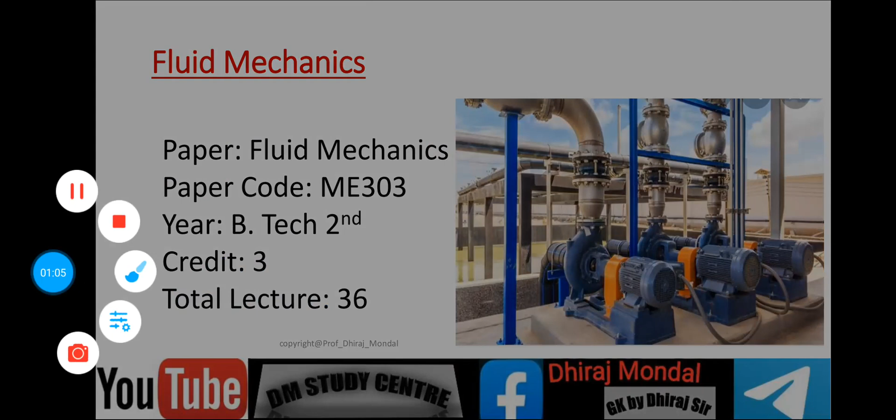The paper name is Fluid Mechanics, paper code ME303, for BTech second year students, credit 3, total 36 lectures. According to the syllabus, 36 dedicated lectures will be given. But don't take any tension about whether your syllabus will be covered - just follow my lectures, and this subject will be covered in depth through discussion.

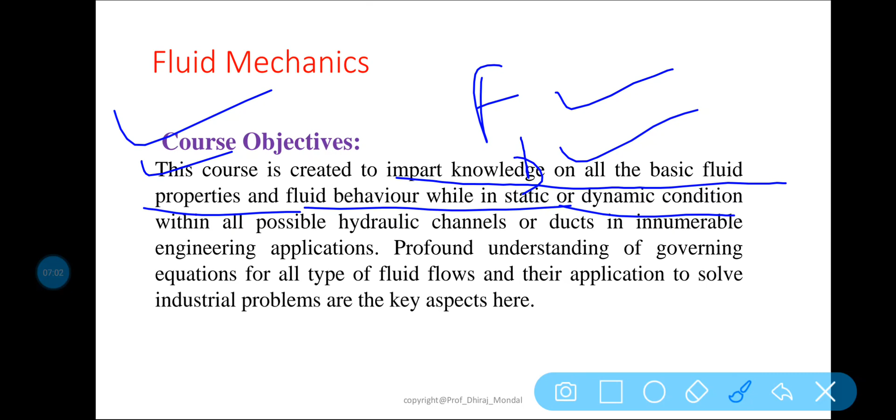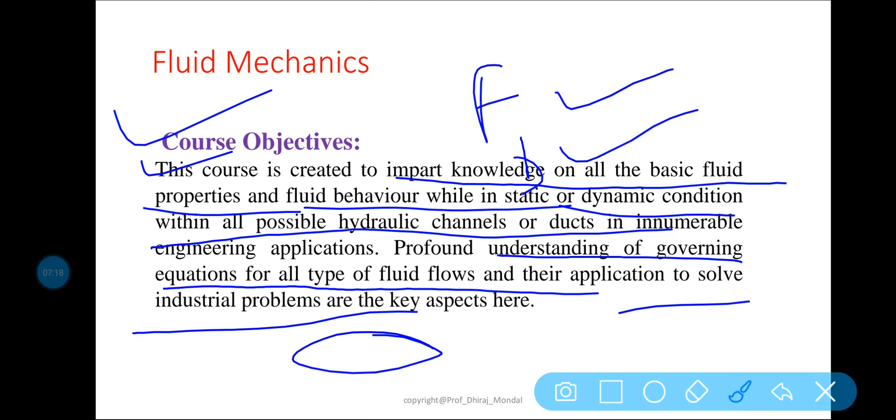So first of all, let us discuss the course objective. The course objective is created to impart knowledge on basic fluid properties and fluid behavior while in static or dynamic condition. The fluid may be in static condition, the fluid may be in dynamic condition. So based on that you have to gather knowledge within the possible hydraulic channel or duct when the fluid is flowing through an open channel or through a pipe. Also understanding of the governing equations of all types of fluid flows and their application to solve industrial problems and key aspects. So this is all about the course objective. I hope it is clear.

Now course outcome, what is the outcome, why you are studying this subject, very important. There are mainly six outcomes. The first outcome is overall - a student should be able to gain an overall idea about fluid flow problems.

Then, able to gain knowledge about the calculation of hydrostatic forces on flat and curved plates. We will be discussing later what is a flat plate, what is a curved surface, how much pressure is applied, what is the center of pressure, and all this will be discussed later on. So this is course outcome number 2.

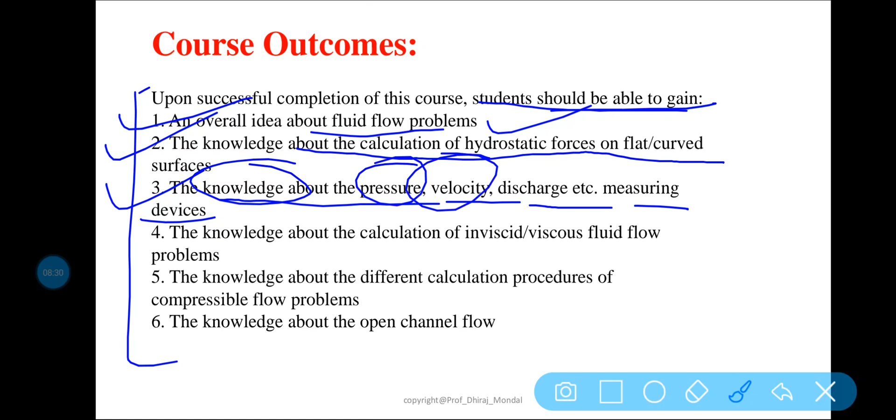Course outcome number 3: knowledge about pressure, velocity, discharge, etc. measuring devices. So some knowledge will be gathered on pressure - how we can calculate the pressure at a particular point, how we can calculate the velocity of a fluid, how we can calculate the discharge, that is the volume flow rate. These are the measuring devices.

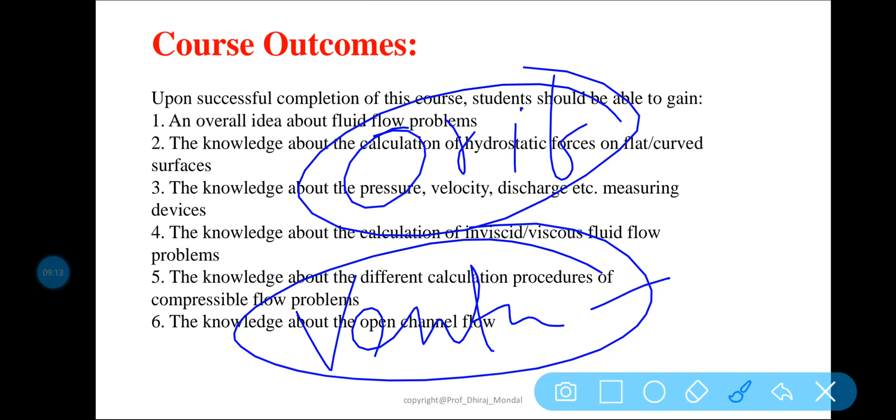You know that by the help of a barometer you can measure pressure, by the help of a manometer, by the help of a differential manometer you can compare pressure between two points. By the help of a pitot tube you can measure the velocity of a fluid when it is flowing. By the help of a venturimeter you can calculate the discharge. By the help of an orifice meter also flow rate can be measured. So these are the devices. By the help of Bernoulli's theorem, these devices - venturimeter, orifice meter and pitot tube - are all working.

So you know that outcome number 3, knowledge about pressure, velocity and discharge measuring devices, is very important - how it is basically applicable from an industry point of view, everywhere it is applicable. So when fluid is flowing through a pipe, how much fluid is flowing - whatever the oil, petrol, diesel, how much it is flowing, or from a water tank, how much water is discharged from a barrage.

By the help of this, your flow measuring instrument, you can device and measure the discharge by the help of a triangular notch, that is your V-notch, or rectangular notch - lots of measuring devices are there. By the help of that you can measure the particular discharge.

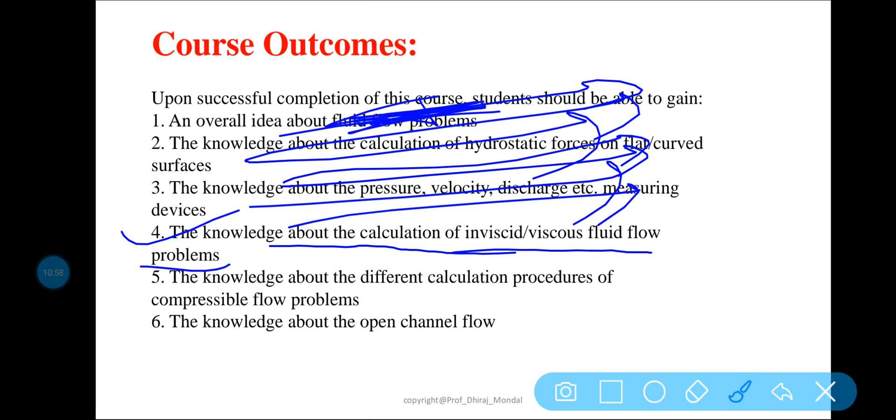Now come to the next point, point number 4: knowledge about the calculation of inviscid or viscous flow problems. Inviscid or viscous flow problem means - you know viscosity. What is viscosity? Viscosity is defined as the property of a fluid which offers resistance to the movement of one layer of the fluid over another adjacent layer of fluid. When the fluid is flowing, one layer of the fluid is gliding over another adjacent layer, and as a result you will experience some frictional dissipation and frictional resistance. Because of that the movement of the fluid is resisted - that is because of viscosity.

Now, the calculation of inviscid, that means a fluid which is not experiencing any kind of viscosity, is called inviscid fluid. So viscous and non-viscous fluid, the complicated and complex problems, you can solve by the help of course outcome number 4. This is our course outcome number 4. These will be discussed.

What is viscosity, what is Newton's law of viscosity, all these will be discussed later on in your upcoming session. So here we are discussing the overview of fluid mechanics - what is the course outcome, course objective, program educational objective, and all these will be discussed.

Next point is the knowledge about different calculation procedures of compressible flow problems. Compressibility means which can compress. If this is your cylinder and this is your piston, when the piston moves upward, the volume of the cylinder decreases. As volume decreases, pressure increases - P is inversely proportional to V, Boyle's law. So as pressure increases and volume decreases, temperature also increases, because PV equals MRT or nRT, so P is proportional to T.

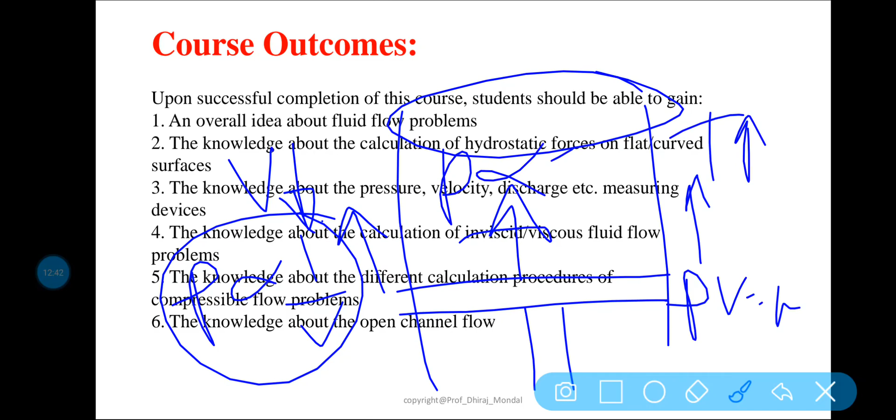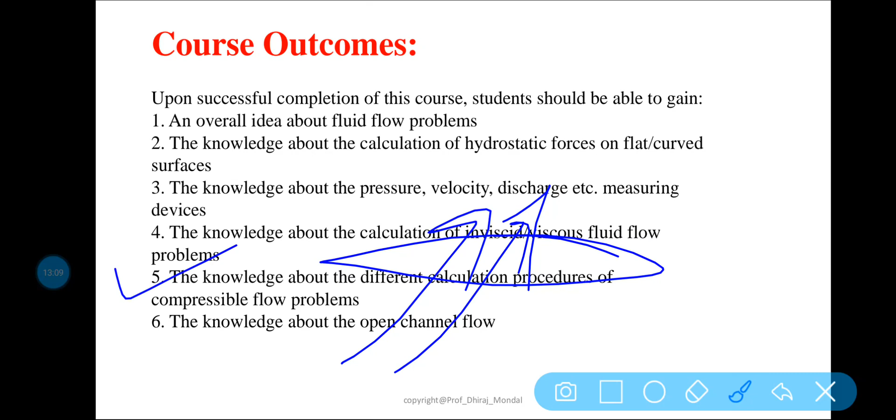So what I mean is, whether the fluid is compressed in nature or incompressed in nature, what about the calculation procedure? What will be the volume? What will be the other parameters and properties? What are the characteristics? All these phenomena will be discussed in this subject, noted in course outcome number 5.

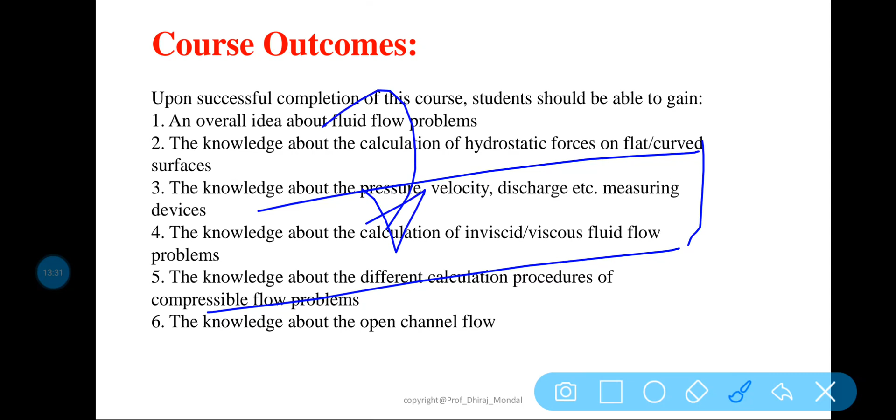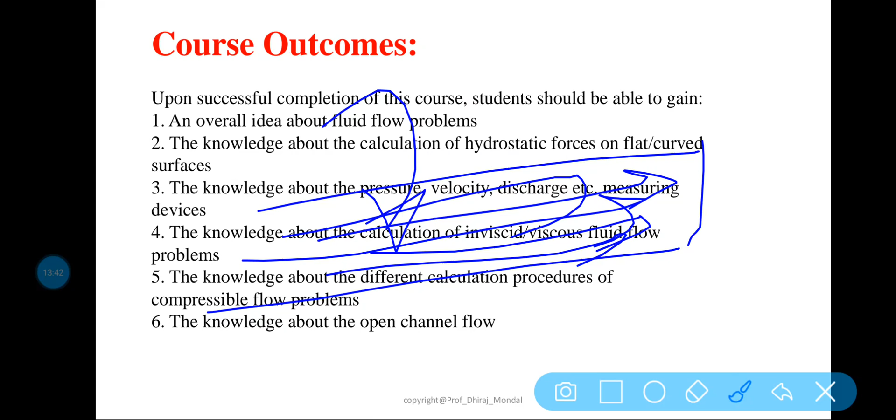Then course outcome number 6, knowledge about open channel flow. Open channel flow means when fluid flows through an open channel - the total system is open and the fluid flows through a canal or confined space, but at atmospheric pressure. Through open channel flow, the calculation, viscosity, velocity, all these measures will be done - this is course outcome number 6.

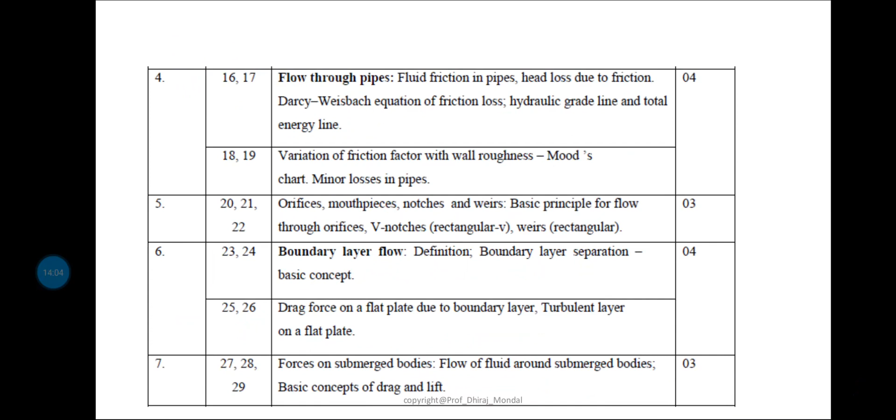Now let us discuss the syllabus. We have classified the syllabus into different modules. There are mainly 9 modules, and the lectures are divided based on these 9 modules. Module 1 will be taken in one lecture.

Introduction to fluid mechanics, fluid types, introduction to viscosity - these are discussed, but kinematic viscosity will also be discussed. Surface tension is not in the syllabus, but I will be discussing it because it's very important from your GATE point of view. This term is not given, although I will be touching on that part also.

Variation of viscosity will be discussed. What is surface tension? In case of soap bubbles, what phenomena occur? That will be discussed here also. Capillarity will be discussed - in case of soap bubble, water jet, hollow bubble, what are the surface tension effects? Then bulk modulus will be discussed, and a lot of things will be covered in this chapter for module number 1.

Next, module number 2, fluid statics. When the fluid is static, meaning at rest, what are the conditions? What are the pressure, force, and other parameters? Then for a submerged fluid - vertical, inclined, curved - what is the center of pressure, stability of floating bodies, what is metacenter? By the concept of metacenter, the ship is moving, why it is not tilting or flipping in water.

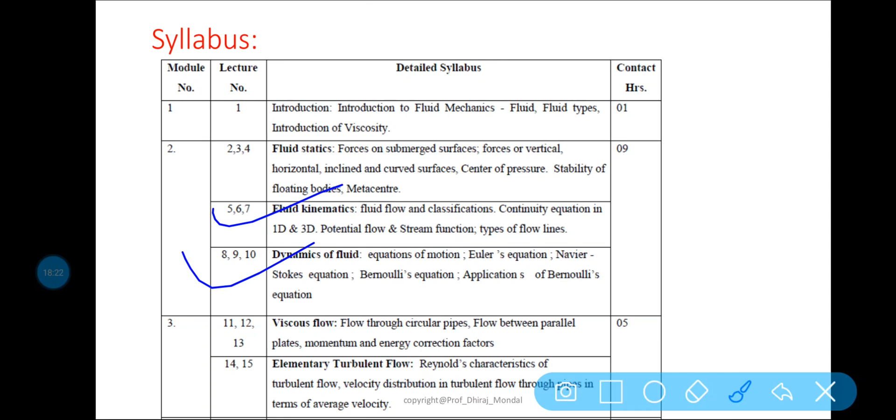Come to the next chapter, that is dynamics of fluid flow. Here, when the fluid is flowing, velocity and acceleration are discussed, and also we consider the force causing the motion of the fluid, which is called dynamics of fluid flow.

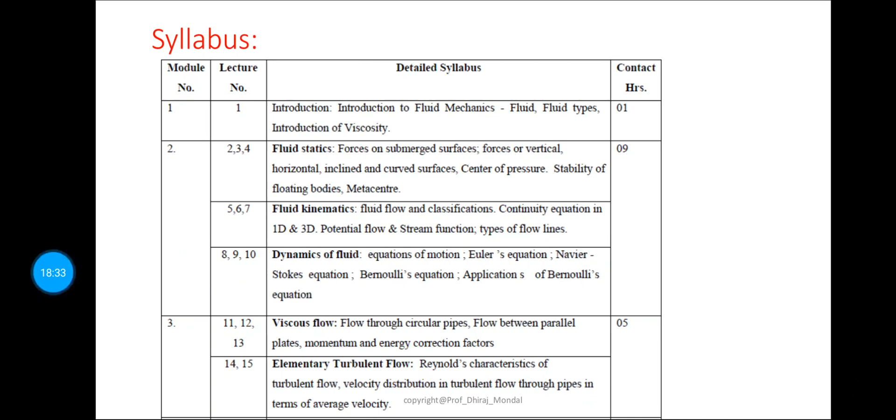So in dynamics of fluid flow, what we will be discussing is Euler's equation of motion. Then from Euler's equation of motion, how we can derive Bernoulli's equation of motion. Then Bernoulli's equation of motion will be discussed here.

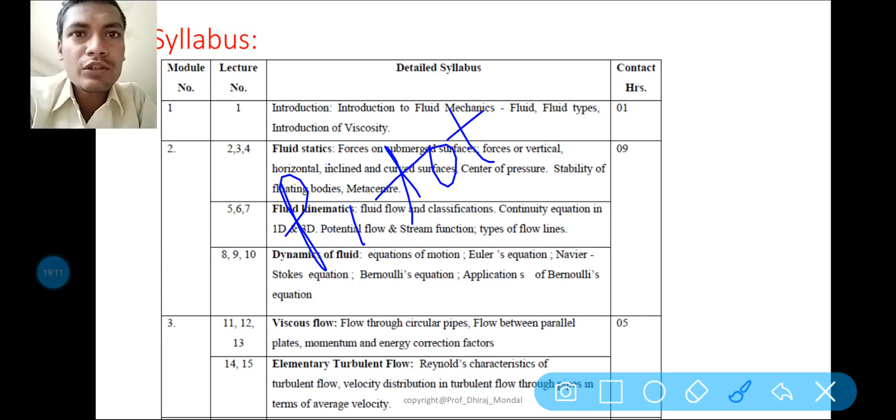After that, venturimeter - from the application of Bernoulli's equation there is a venturimeter device, orifice meter, then pitot tube will be discussed. Basically how it is operating, and what are the derivations, what is the calculation - all of this will be discussed in dynamics of fluid flow.

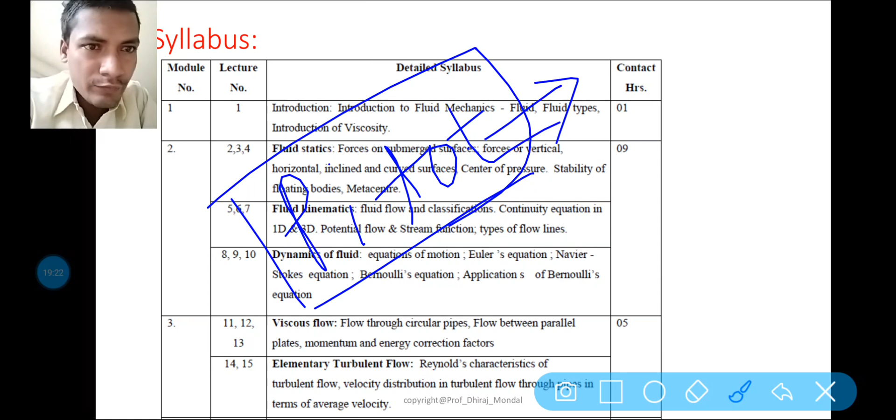Next come to viscous flow. When the flow is circular, meaning when the fluid is flowing through a circular pipe or parallel plate, then what is the momentum and energy correction factor, what phenomena occur in viscous flow, will be discussed. Then elementary turbulent flow - Reynolds characteristic of turbulent flow and velocity distribution in turbulent flow will be discussed.

I think it is clear. Now come to the next slide, that is module number 4. In module 4, flow through pipe will be discussed. Here mainly there are two types of frictional loss.

One is major loss, another is minor loss. Major loss is where Darcy-Weisbach formula and Chezy's formula will be discussed. By the help of that, when fluid is flowing there may be some frictional dissipation, frictional loss, and how much energy is lost because of that friction loss will be discussed here.

Minor loss occurs when the fluid is flowing and there is a bend section, or suddenly the diameter of the pipe is enlarged, or suddenly the pipe is contracted - contraction is occurring like this. So because of that, when the fluid is flowing, there is a joint between two pipes. Because of that there may be some energy loss, and what those energy losses are will be discussed here. I think it is clear.

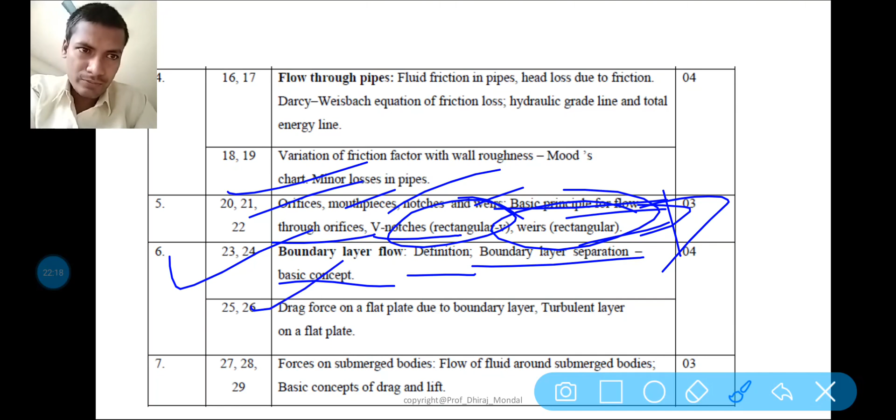Now boundary layer flow, very important. Definition of boundary layer separation, basic concept needed. Then drag force, then turbulent layer on the flat plate will be discussed.

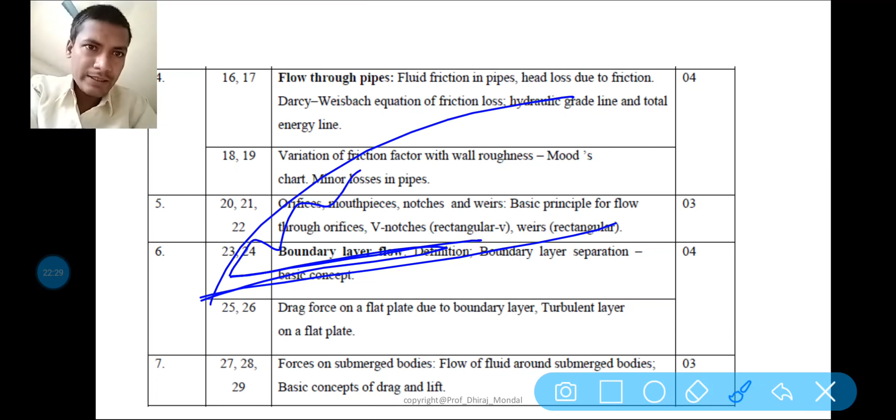That means when the fluid is flowing over a plate, there may be some friction, and because of that the flow may be rotational or irrotational. What is rotational, what is irrotational, will be discussed afterward when we talk about kinematics of fluid flow. So one by one we are proceeding.

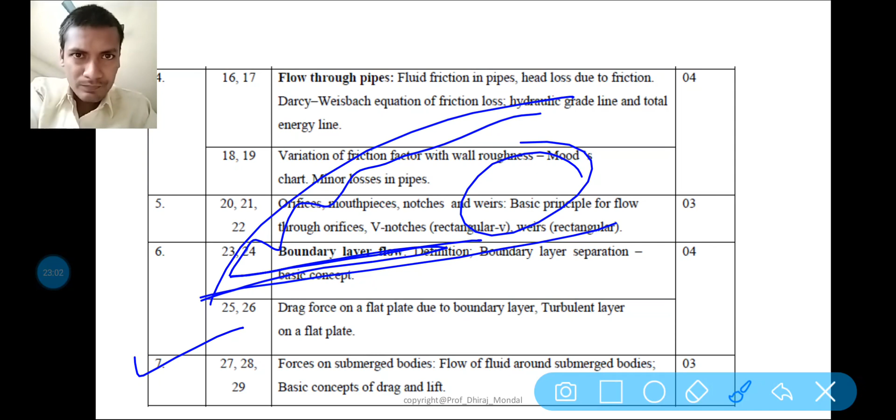This is your introduction class, and what we are talking about is the syllabus, what we are going to discuss in the later classes, in upcoming classes. So there should be some sufficient idea about what we are going to study, so that it will be more easy to understand after this part is discussed.

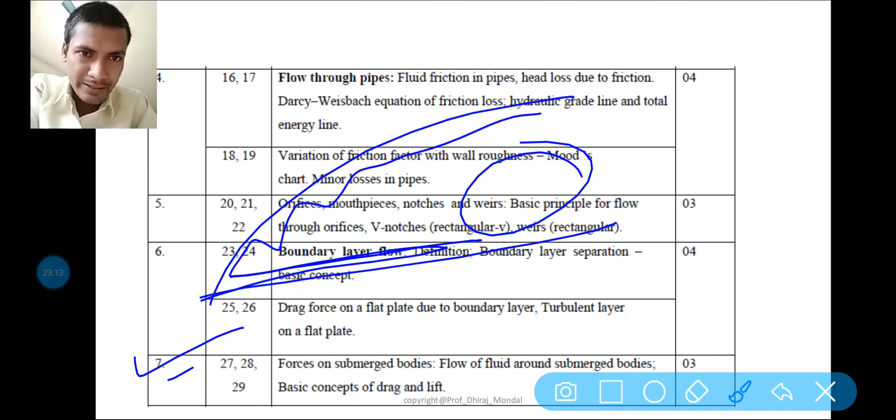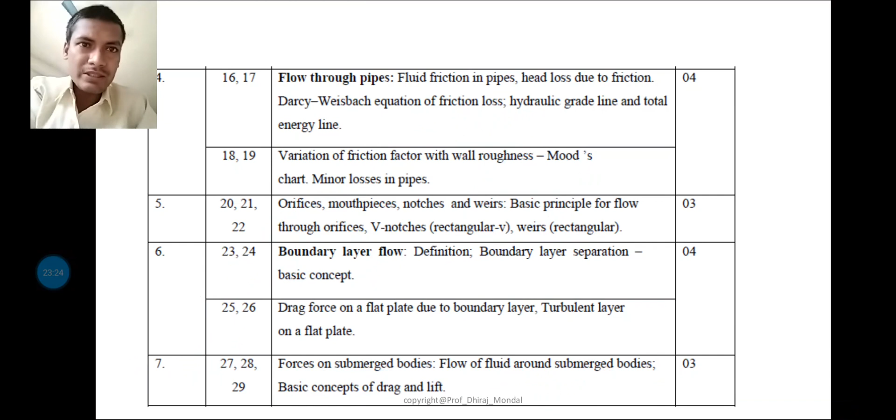Now coming to module number 7: force on submerged body, flow of fluid around submerged body, basic concept of drag and lift. So these are the syllabus, you can see. Sorry, that was not the last module. Module 9 is the last.

Here you can see module number 8, dimensional analysis and model studies. In this chapter, basically, it is used for design purposes, you can say.

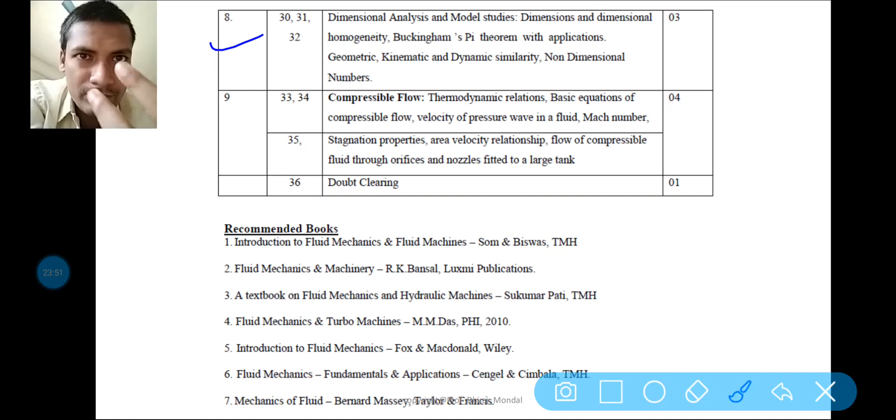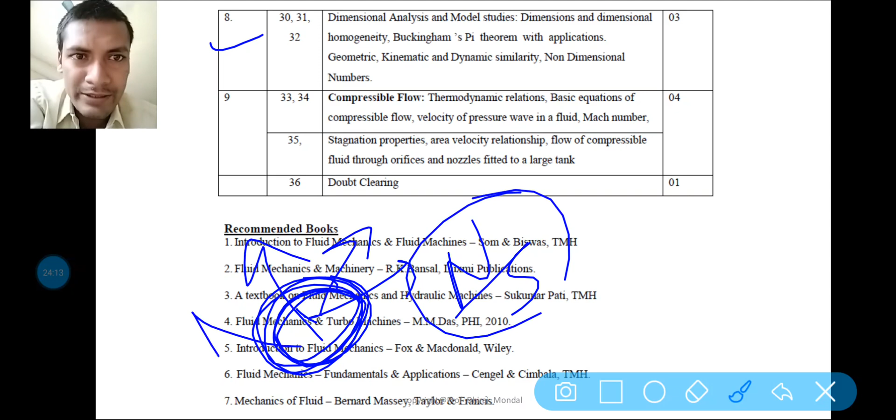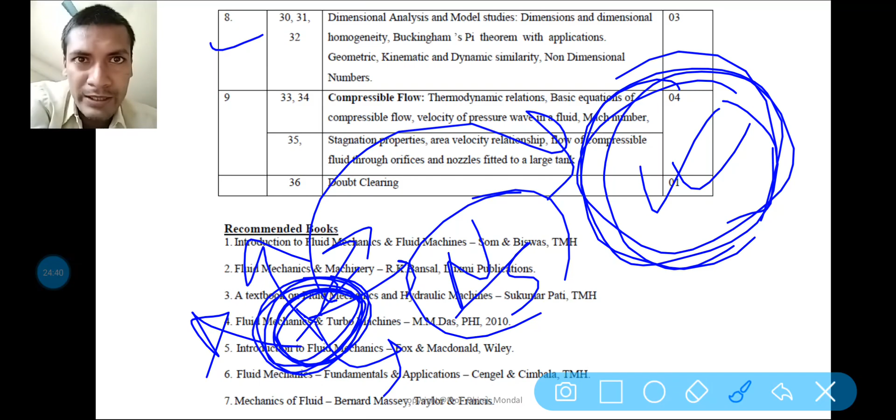That means when you are going to make a prototype, first you have to make a model. If you want to manufacture a hydraulic turbine, first you make a small model, and you compare that model, determine the specific speed, unit power, unit discharge, unit speed - all this you calculate, and based on that you make it in larger scale. That is your trial, because a large scale turbine you can't manufacture at a time - there are so many expenses and material costs. So first you make a model, then make it in large scale as a prototype. Some clear idea on this will be given in this chapter.

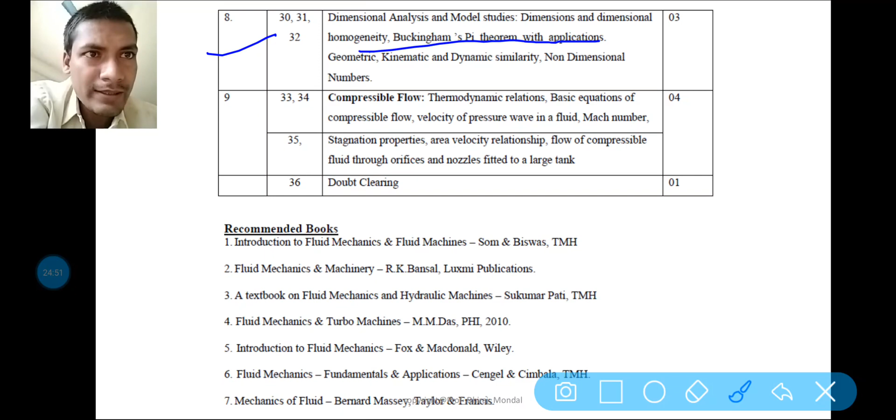Buckingham pi theorem, very important. Then your non-dimensional numbers: Froude number, Reynolds number, Euler's number, Weber's number - these are the numbers which will be discussed here. Mach number is also there. By the help of these non-dimensional numbers, we can determine whether the fluid is laminar or turbulent using Reynolds number, whether the fluid is compressible or incompressible, and a lot of things. This will be discussed in module number 8.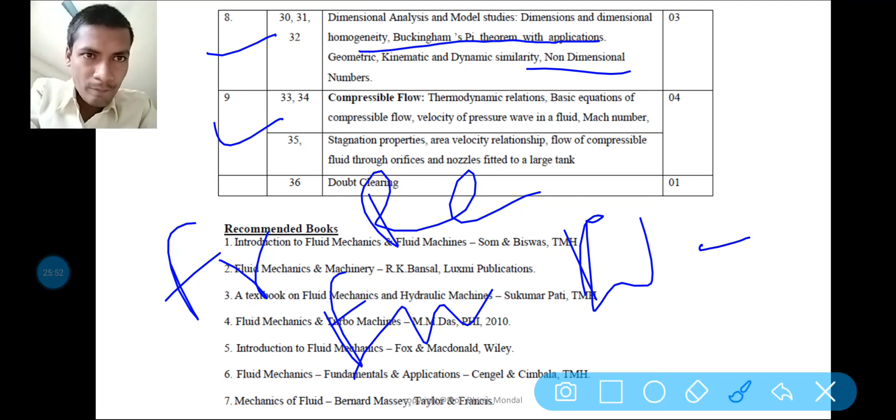In module number 9, compressible flow talks about the compressible flow - what is the Mach number, what is the pressure, velocity, what is stagnation property, area velocity relation, and the concept of nozzle, orifice - these will be discussed.

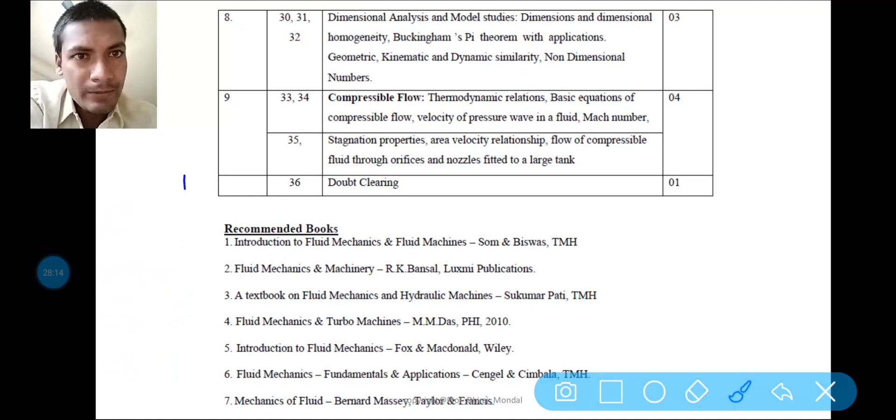Now coming to the sub books. So the syllabus is already clear, I think, about what we need to understand and study in upcoming lectures.

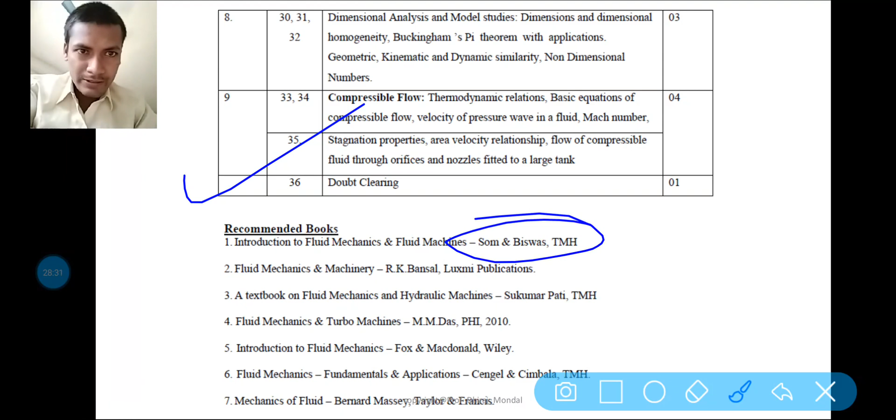Now I have to recommend some books. First is Som Biswas, Tata McGraw-Hill publication, and R.K. Bansal, Luxmi publication. So R.K. Bansal and Som Biswas, these are the books which are available in your library.

It is also available in e-copy. Already I have sent you the courseware.

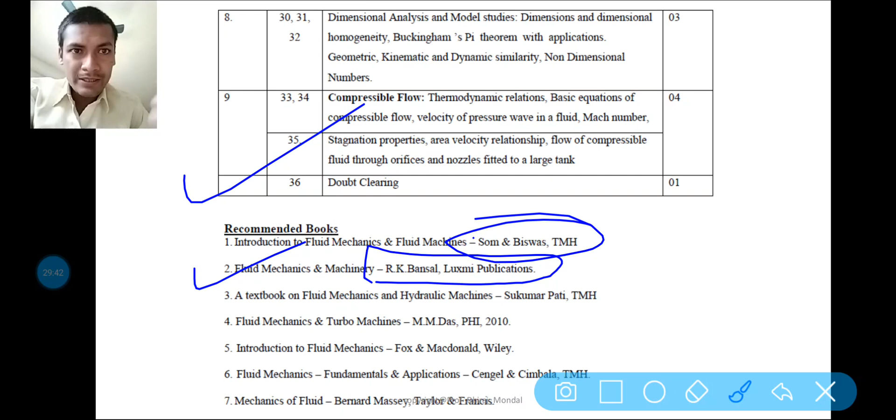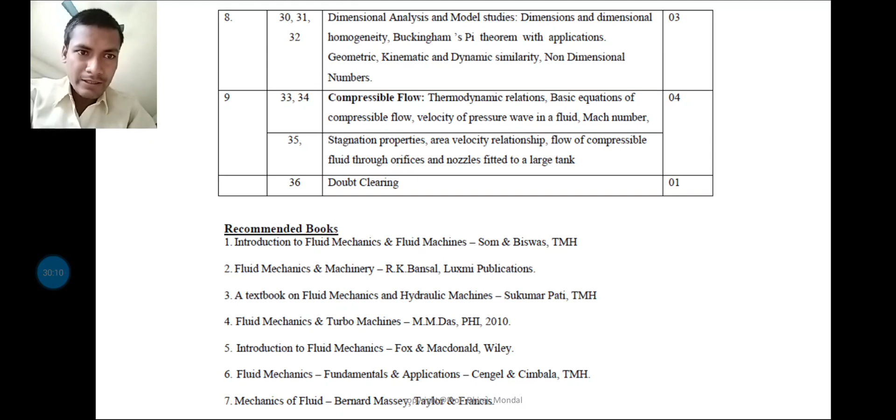Now coming to these books - I can mention all of them, but Som Biswas and R.K. Bansal are sufficient from the exam point of view. If you want to proceed for IAS exam or GATE exam, then the rest of the books are given here - Cengel's book, Fundamental and Application of Fluid Mechanics by Cengel and Cimbala, this Tata McGraw-Hill book, is also very important.

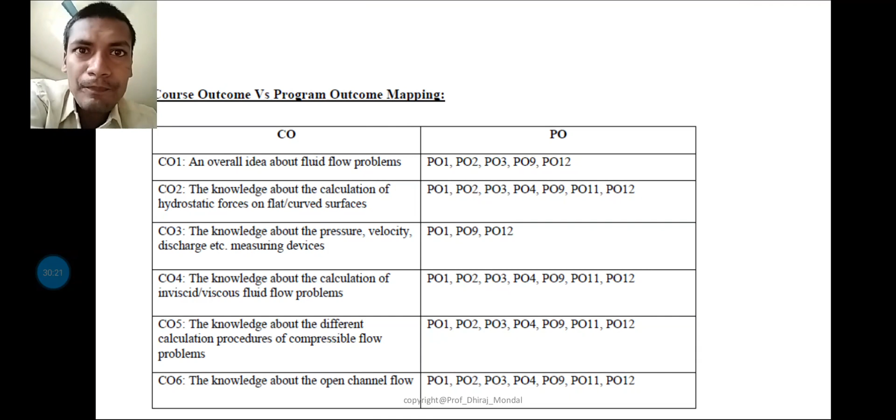Clear? Now come to the next point, that is your course objective outcome versus program outcome mapping.

Basically, already I have told you, the mechanical department has already got NBA accreditation. And you know that if any department has got NBA accreditation, then the future scope and tendency to get a job, or tendency to get admission in foreign universities, becomes much easier, because this department, JIS College of Engineering Mechanical Department, is NBA accredited. That's why I want to suggest you don't forget the opportunity to take admission in JIS College of Engineering Mechanical Engineering Department, as it is accredited, and also the Electrical department and CSE department are accredited.

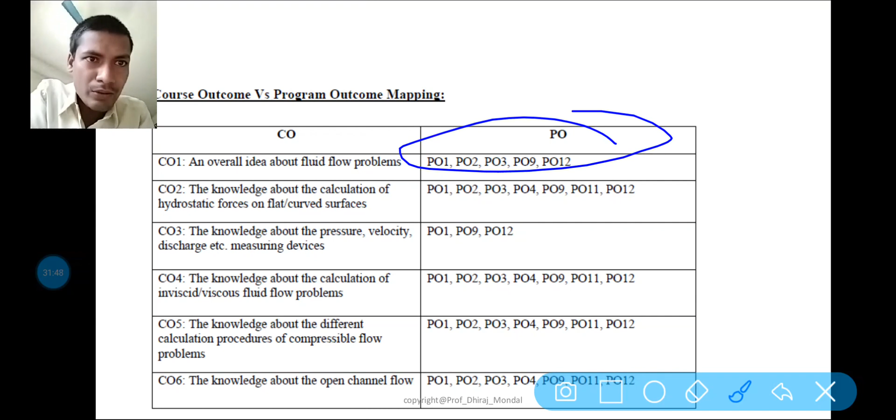Now basically what I want to say is that the course outcome versus program outcome, you have to know here. Basically, course outcome number one is an overall idea about the fluid flow problem, also it is discussed, and it is basically suitable, fitted in PO number 1, PO number 2, PO number 3, 9 and 12.

PO is what? Program outcome - what is the outcome of that particular program? So that is fitted here in CO1. PO 1, 2, 3, 4, 9, 11, 12, it is fitted in CO2 - the knowledge about the calculation of hydrostatic force.

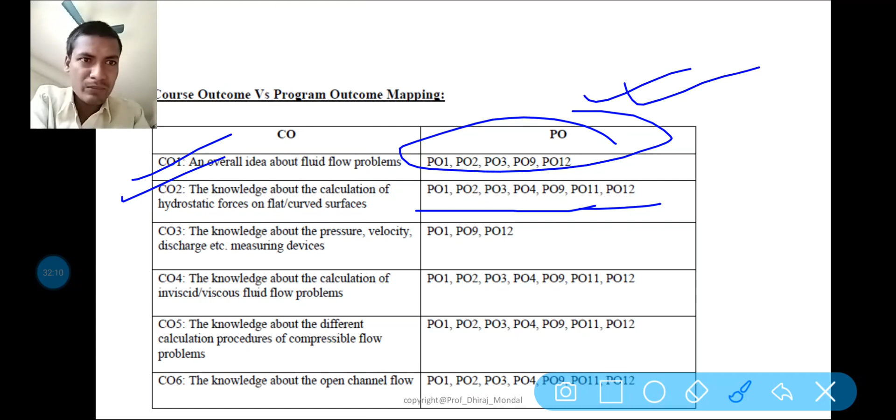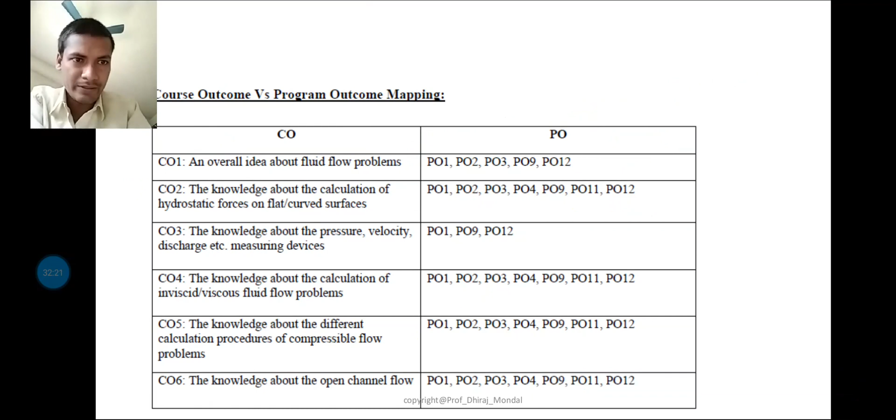So accordingly, what are these PO1, PO2? I am not going into details. There are 12 number of POs. Based on that, this CO is mapped, and you can see this CO versus PO mapping.

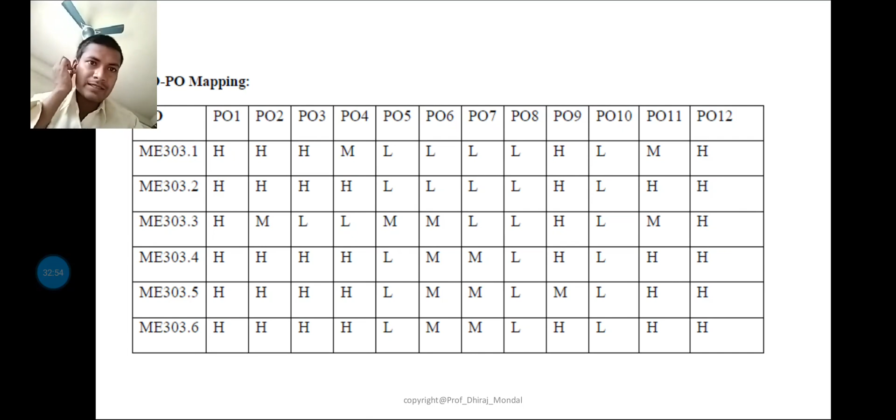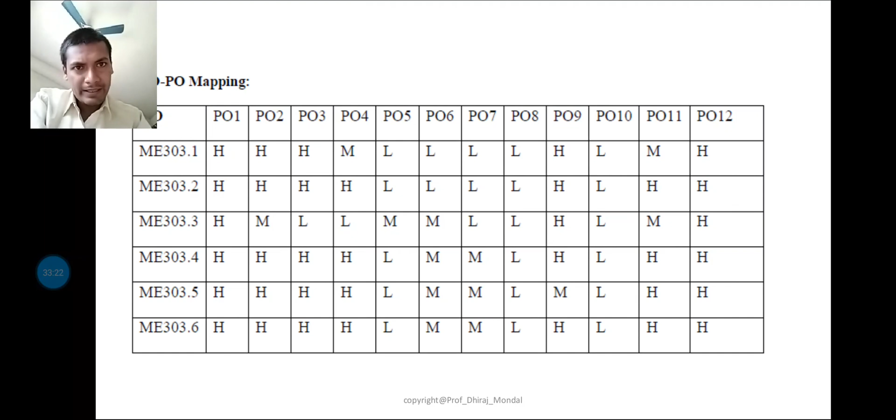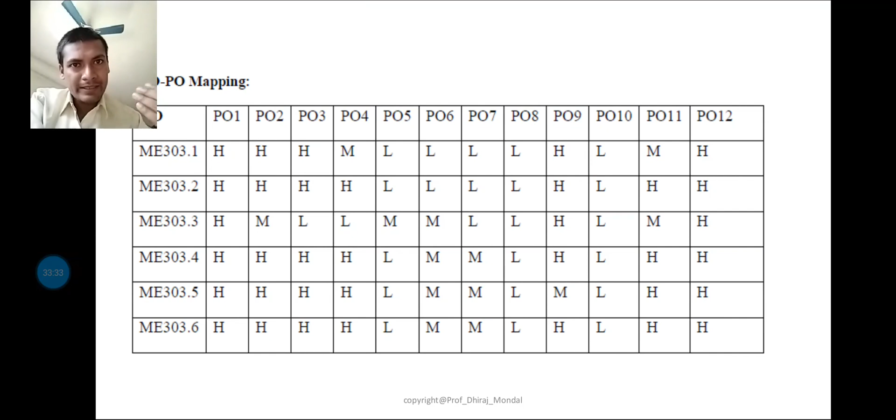So based on this, basically what is the need of this mapping? Basically we are making our subject, producing our student - in which area you want to proceed. Based on the market point of view, based on the future scope, the syllabus is designed in such a way that if the scope in industry is more, if the scope for research and development is more, then we have to design our syllabus so that the student can understand, can study, go through their lessons from the industry point of view, or in design research and development point of view, that means higher study. So all the parameters are taken, and an optimum syllabus is designed, and based on that syllabus the student can get benefit, wherever they want to proceed.

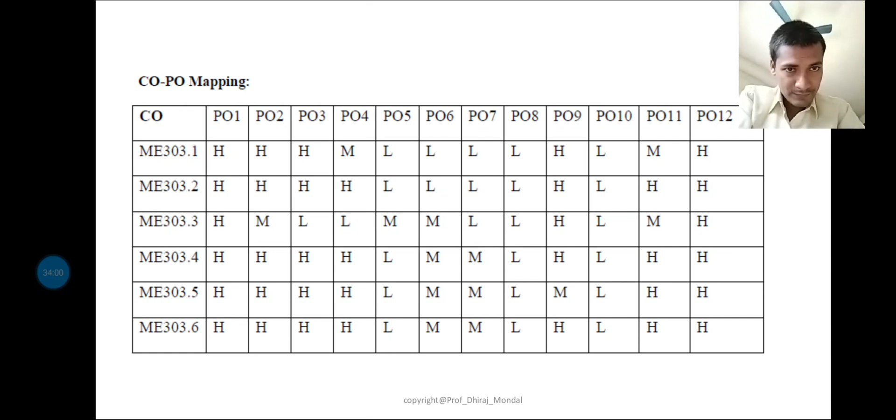This is the mapping, CO versus PO mapping - high, medium, low. So CO1, CO ME303, CO1 is mapping with PO1, it is high. So high, medium, low according to the viewpoint of the NBA. So it is made, nothing more to discuss here.

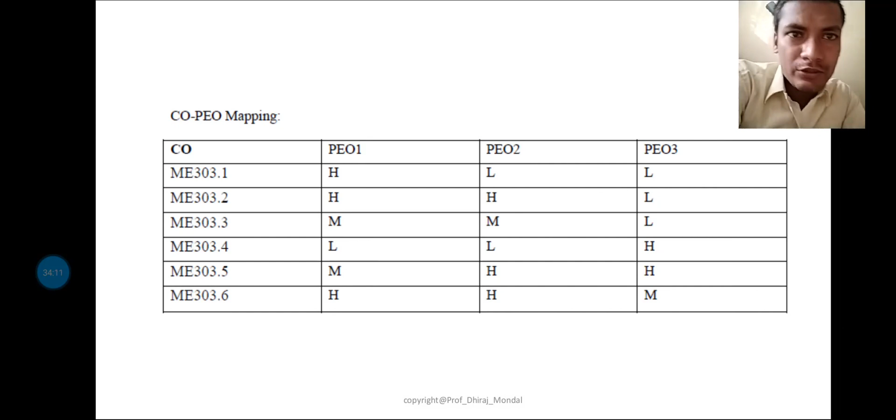Again, program educational objective. Now let us discuss about CO versus PEO. So there are some PEO, 1 to 3, program educational objectives.

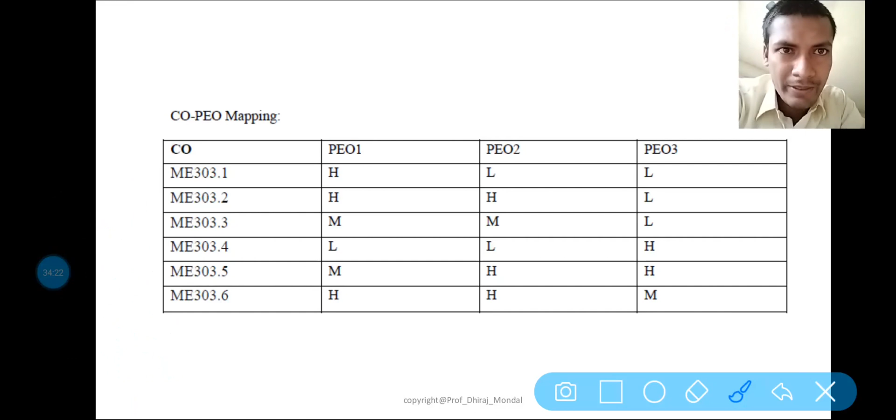Here we have mapped it with CO, the high, medium, low. So nothing more to discuss on it.

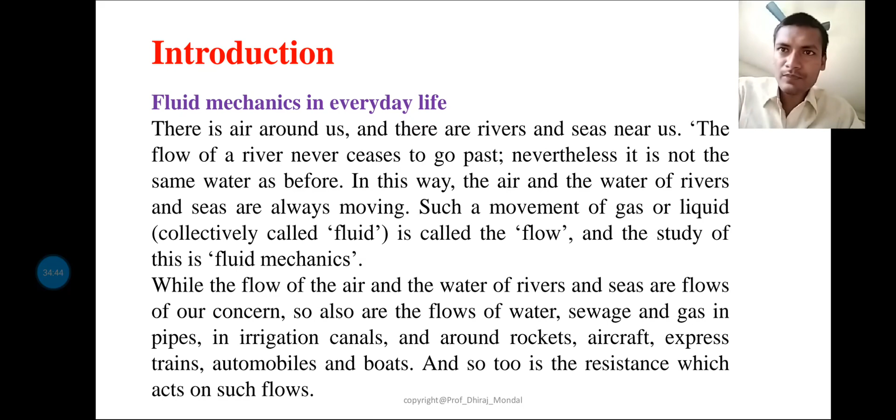So let us come to the syllabus topic, fluid mechanics, the introduction. In this class, first we will be discussing what is fluid mechanics, and what are its applications, why we are studying this fluid mechanics. So first of all, the definition of fluid mechanics. Do you know the definition?

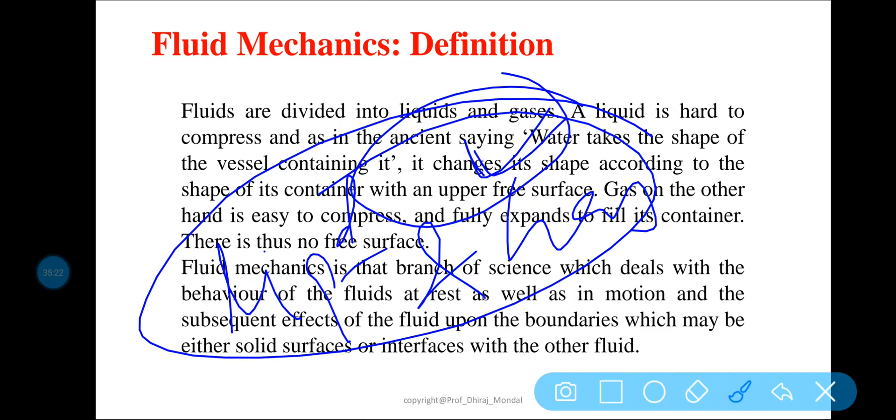Fluid mechanics is that branch of science which deals with the behavior of the fluid, whether in liquid or gas, at rest as well as in motion. Thus this branch of science deals with the static, kinematic and dynamic.

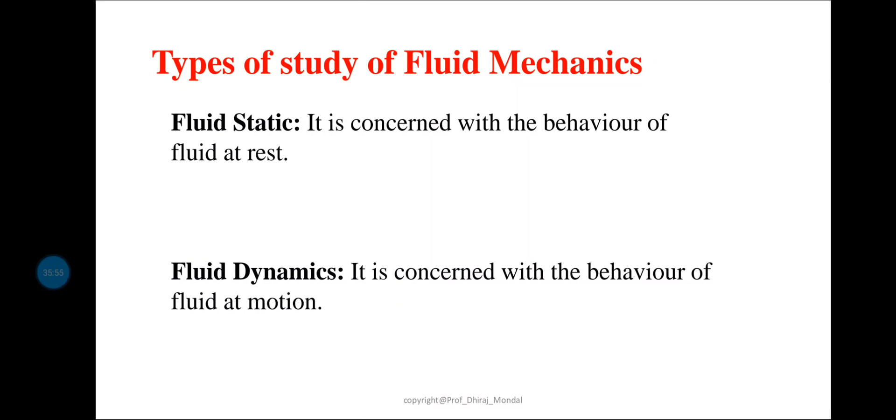The study of the fluid at rest is called fluid statics. The study of the fluid in motion where the pressure force is not considered is called fluid kinematics. If the pressure force is also considered for the fluid, then it will be called fluid dynamics.

So again, the study of the fluid in motion where the force is not considered is called fluid kinematics. If the pressure force is also considered for the fluid in motion, then that branch of science is called fluid dynamics. I hope this is clear. So this is all about the definition of fluid mechanics.

Now let us discuss what is fluid. Basically, fluid is the substance which has the ability to flow from one place to another place. That means anything which is flowing is called fluid. For example, air is flowing from one place to another, so it is one kind of fluid. Water is also flowing with little permanent deformation, so it is also called fluid.

Now let us discuss the difference between solid and fluid. This is your solid and this is your fluid. Do you know the term elasticity? Elasticity is the property of a material by the help of which a material can regain its original shape and size if the external force is withdrawn on it.

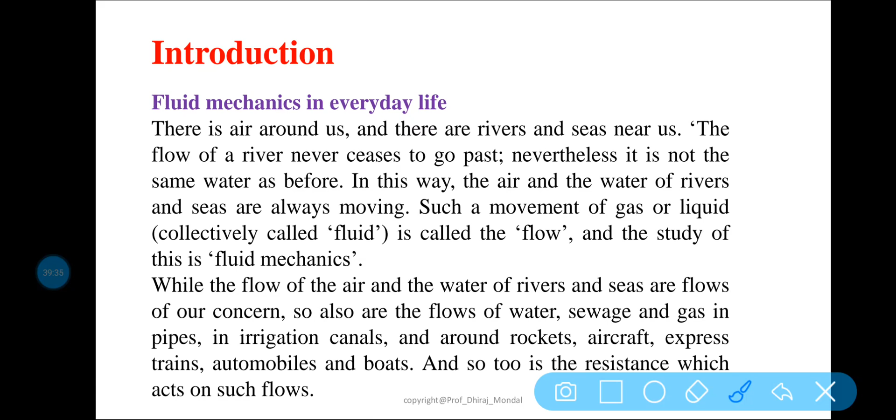Zero memory substance means it is basically forgetting its own memory. That means when the fluid is flowing, it cannot regain its original shape and size.

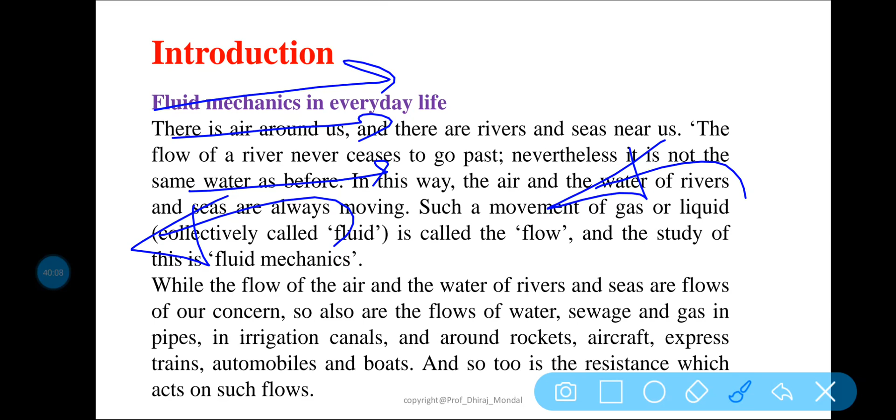But if you are applying some force on the solid, it may regain its original shape and size if there is no deformation occurring, up to a certain limit, the proportional elastic limit, which you have gone through in strength of materials. So the solid is regaining its original shape and size. For example, if I am applying some force on this solid, it may deform like this. If I withdraw that force, then again it makes its original shape and size.

But in case of fluid, it is not happening. When the fluid is flowing, there is little permanent deformation. If it is your fluid, I am applying some force, the next shape is like this. Then again it is deforming, again it is deforming, and it is moving forward. So this is the phenomenon of the fluid.

Why am I calling it a zero memory substance? Because it is forgetting its original shape and size, and it is taking the shape of the particular glass or whatever container in which the fluid is placed. If you put that fluid in a glass, the shape of the glass will be taken by that particular fluid.

Now, why is this so important? Human beings or any living being cannot live without fluid, because we are swimming in an ocean of fluid. When a person is moving in air, he is replacing some fluid and moving forward. And as we are taking oxygen, without oxygen we can't live, and oxygen is one kind of fluid. So without fluid we cannot move, we cannot live. You can die if the fluid is absent.

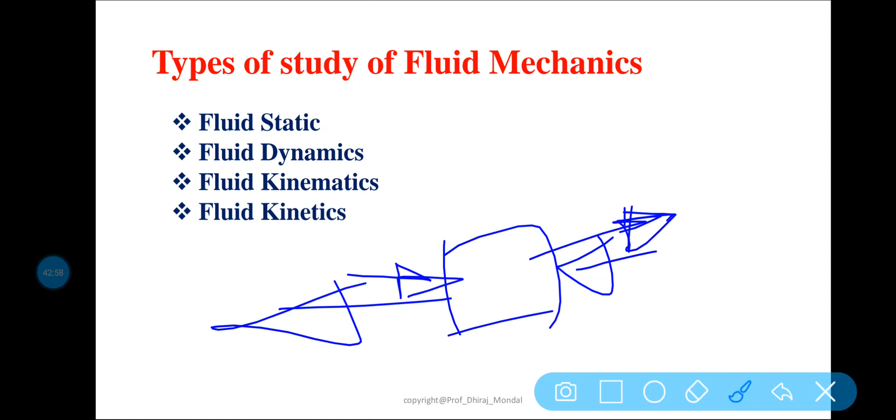Now, as I told you, the definition of fluid is the ability to flow, and it is continuously deforming and moving forward according to the pressure, wherever the pressure is exerted. If pressure is applied at this point, the fluid moves to the left hand side. If pressure force is applied here, whatever force is applied, then it moves rightward like this.

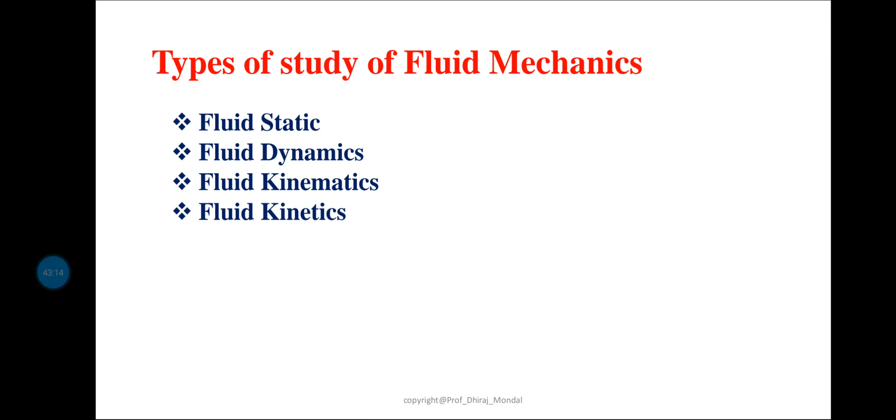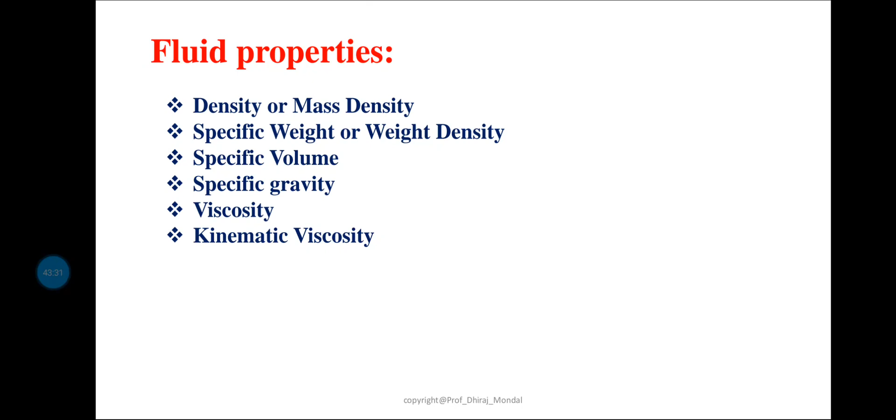Next class we will be discussing the types of study of fluid mechanics, fluid dynamics, fluid kinematics, kinetics. Properties of fluid will be discussed: density, mass density, specific gravity, weight density, specific volume, viscosity, kinematic viscosity. Then fluid properties, Newton's law of viscosity, types of flow - ideal plastic flow, non-Newtonian flow, Newtonian flow. All these will be discussed in the next class.

So today up to this, I hope it is clear. I can assure you that this subject is very, very important and very, very interesting. You will love this subject.